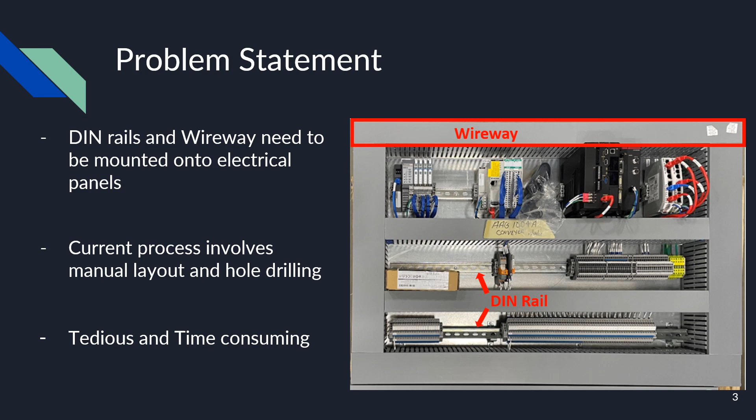Specifically, our machine must accept a panel ranging in width and length of 16 to 72 inches. The machine must also create holes with a number 21 size drill bit with a tolerance of 0.01 inches. The machine must have software-assisted hole coordinate input, along with emergency stop safety measures, and the overall budget for our machine is $14,000.

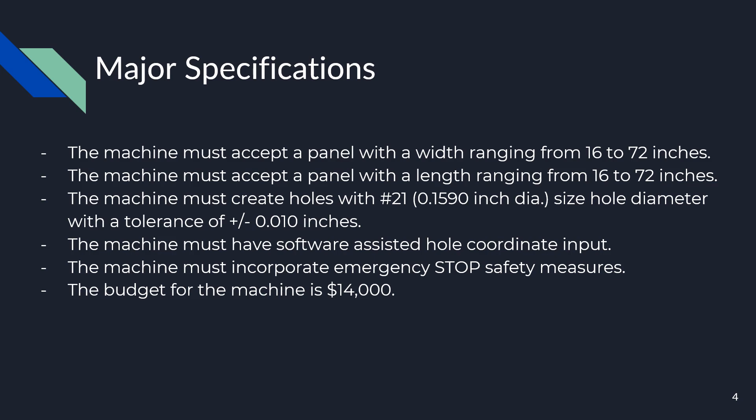Overall, the design that we have chosen to move forward with is a 2.5 axis CNC-controlled gantry-style drilling machine. That is a CNC machine with a servo-controlled x-axis, a servo-controlled y-axis, and a pneumatically driven drill. The software will use G-code generated from the electrical drawings and will be driven using the Acorn CNC controller.

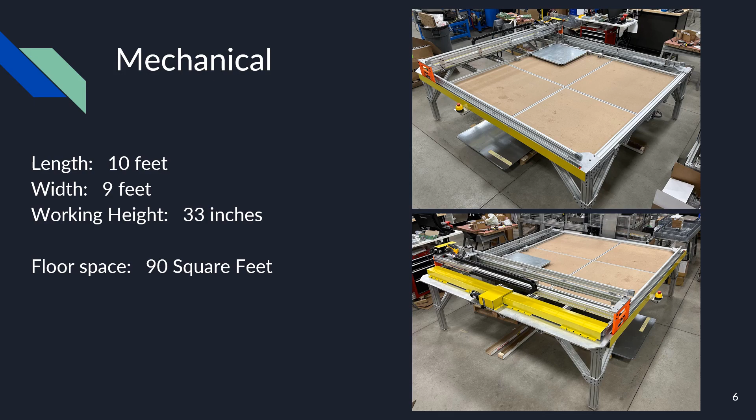Overall, the machine has a length of 10 feet, width of 9 feet, a working height of around 33 inches, and this total covers 90 square feet of floor space. Overall, our extrusion frame was built from multiple sizes of 80/20 aluminum extrusion. These sizes include 15 series and 30 series extrusion.

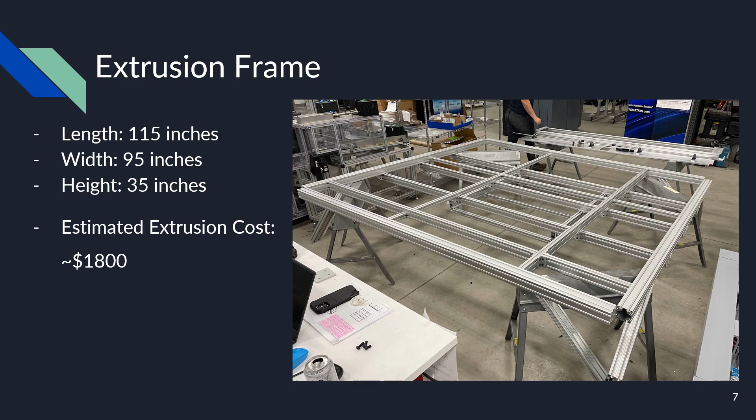Around the outer edge, we have a 3x3 inch extrusion, and then throughout the middle, we get down to as small as 1.5 by 1.5 inches. It's estimated that our extrusion frame costs around $1,800.

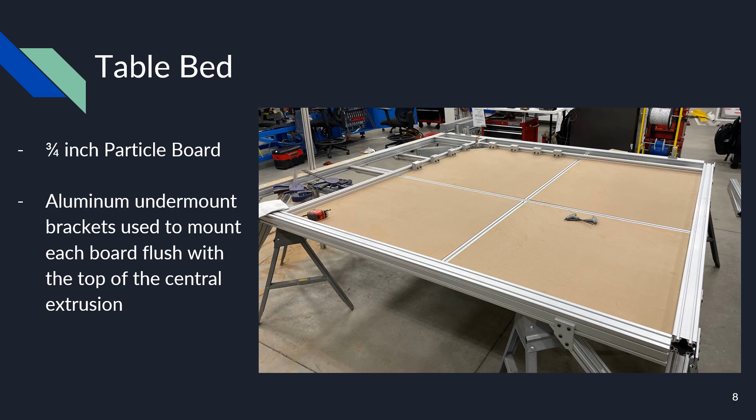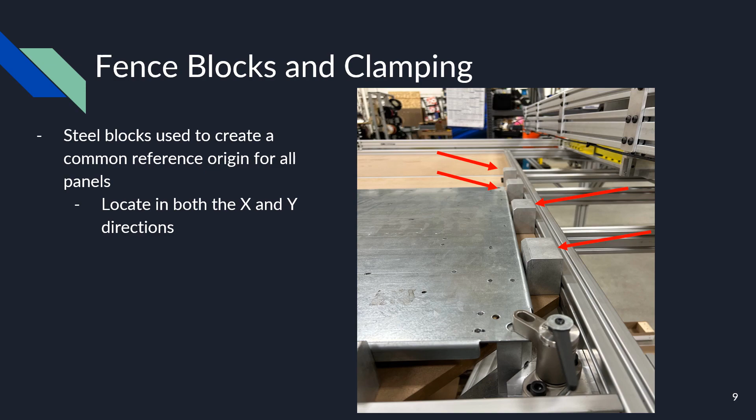These fence blocks are used to create a common reference point for every plate that is put within our machine. This will locate our plate in the X direction and in the Y direction, as well as clamp it in place. Here you can see the 4 fence plates along the X direction. Alongside the fence plates is a simple swing clamp to secure our panel in place.

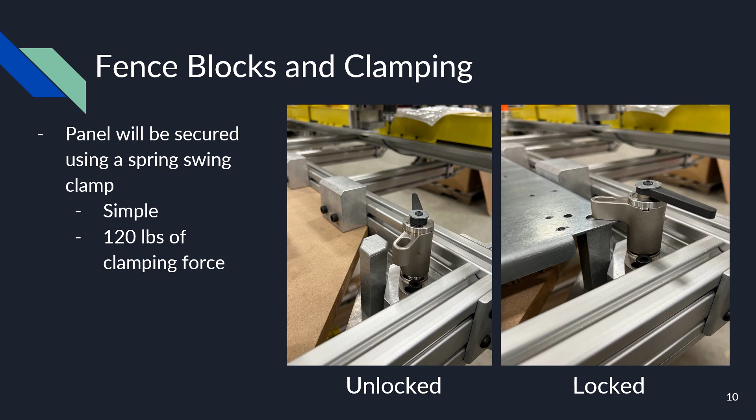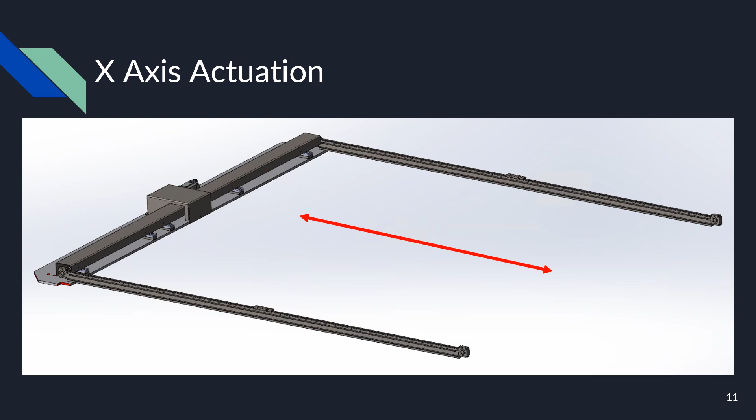Here's a closer up of the actuators we have installed on our machine. We specifically chose Misumi MSA SB1 series belt actuators. They have a length of 2,750 millimeters. They're simply mounted with corner brackets and have a repeatability of 0.025 millimeters.

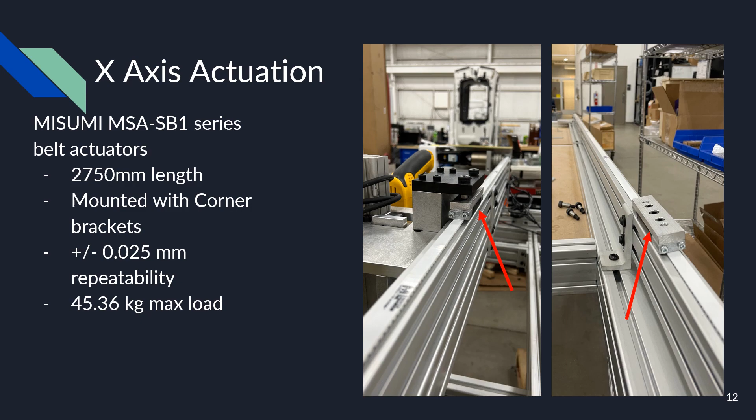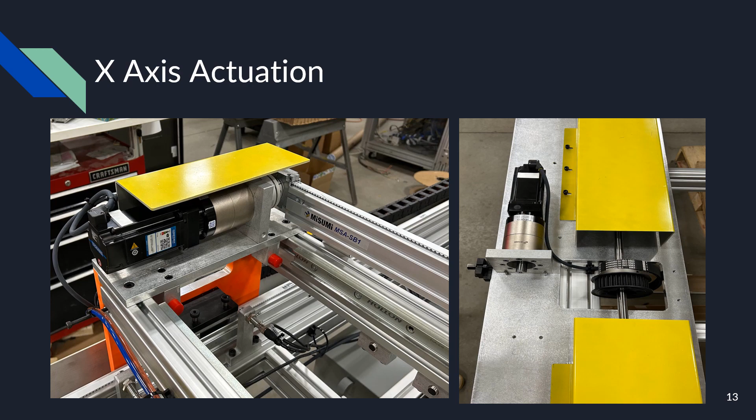Driving those belt actuators are two servos and gearboxes. On the left picture here, we have the servo that is connected directly to the bridge and directly to the Z assembly. This is one servo driving one actuator to move our Z assembly back and forth. On the right, we have another servo and gearbox that is driving the shaft that we were previously talking about for the timing of the two belt actuators.

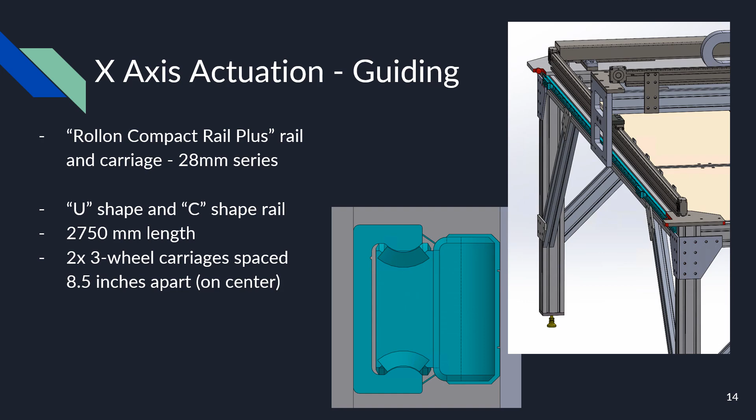Due to the weight of the bridge, as well as the length of the bridge, we chose to move forward with Rollon Compact Rail Plus guiding system. This system is there to support the weight of the bridge while the Misumi actuators move the bridge. Again, we have the gearboxes connected to the servos, which then drive the entire system. And then we have found that our timing pulley has a ratio of about 1 to 1.5 due to the 22 teeth and 34 teeth timing pulleys that we have chosen.

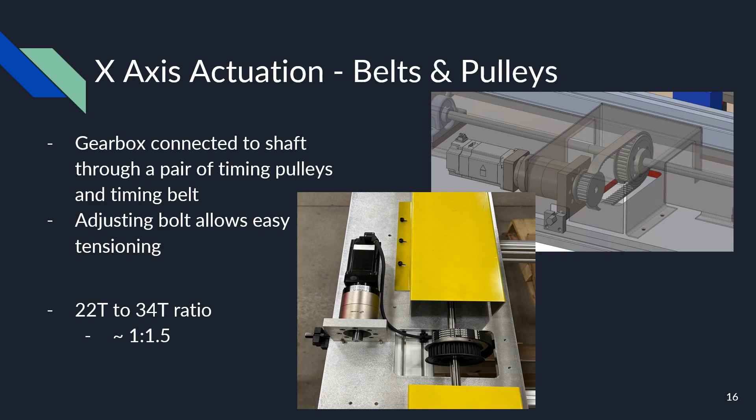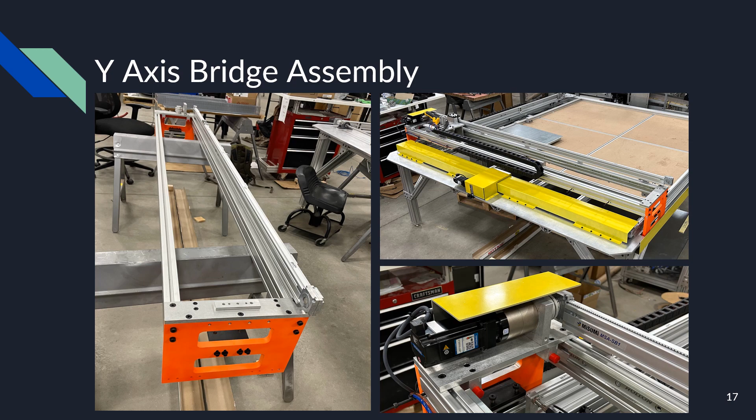Moving on to the Y-axis bridge assembly. On the left here, you can see the bridge as we were starting to assemble it. And then on the right, you can see two photos where it's assembled currently. One of those photos is how it fits on the machine while it's moved all the way into the 0 position. And then the lower picture there is how we have our servo mounted on. We will not be going into a lot of detail on this portion of the machine, as we've chosen to move forward with a very similar design as the rest of the machine.

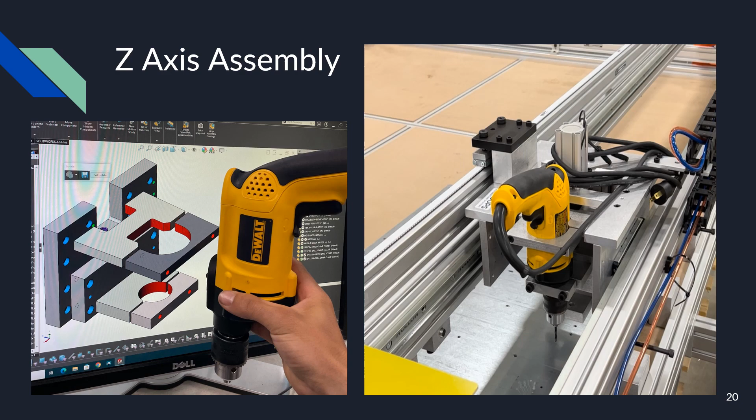At this point, we will move on to the software design of our project. As previously mentioned, the current process of drilling these panels is done by hand and manual measurement. Our solution involves creating readable G-code for our CNC controller. To accomplish this, the electrical schematic must be exported from EPLAN and modified in SOLIDWORKS, where macros can be applied.

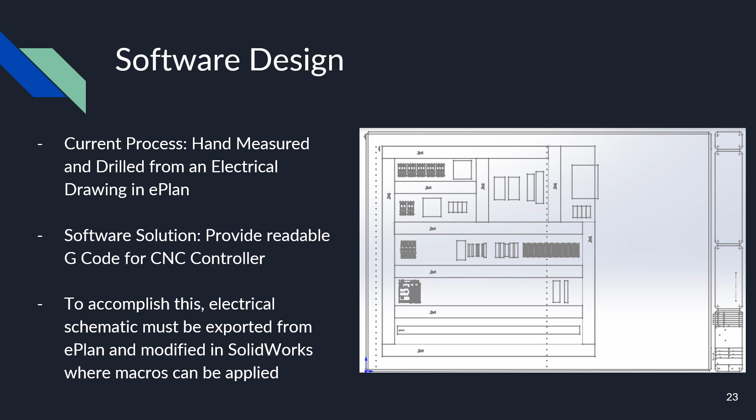The purpose of the macro is to generate G-code for the machine to give the location of the drill holes that are necessary for the panel. To do this, we need to know the panel's layout. Koops makes their panel layouts in a software called EPLAN. Unfortunately, because of licensing restrictions, we cannot manipulate or read data from EPLAN.

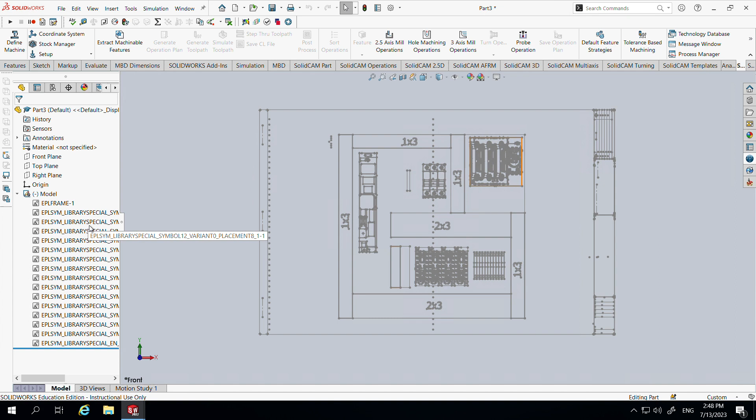So we export their plan as a DXF and open that in SOLIDWORKS, which is what you see right here. You can see some wireways, you can see the components for this panel, and so on. You can see that there are a lot of unnecessary layers, and we still have the components in here. So the first thing that the macro will do is simplify the panel layout.

It's going to delete these extra layers, and then it's going to delete any line shorter than the wireway width we're looking for. So we're looking for these, but anything shorter than those we're going to ignore. So it's going to delete. So let's go ahead and start our macro.

You'll see it's going to ask me to browse and find a file. So I'm going to go to my test files. It's going to open up. It's going to look exactly like it does behind me. So this is the direct file exported from EPLAN. So I'm going to hit done.

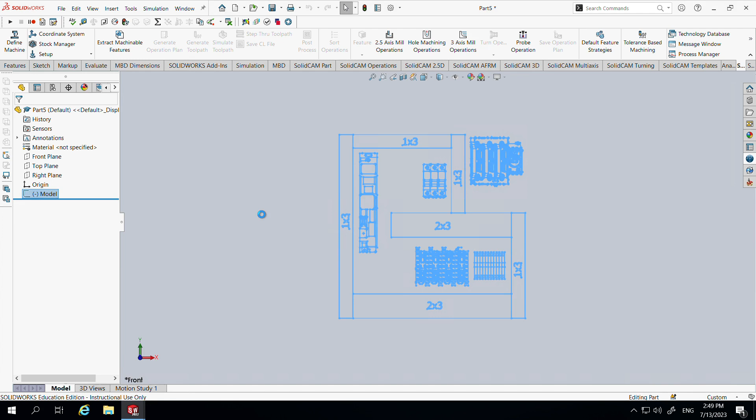It's going to first delete those extra layers, and then it's going to ask me to make the sketch editable so that we can delete those unnecessary lines. The reason this is necessary is that with a lot of these extra points, it will take the macro much longer for our sorting algorithm to work.

The way the macro is going to work is it's going to look at each lower left-hand corner of a wireway, whether horizontally or vertically applied. The next thing it's going to do is look if there's a point in either of those directions that is an expected width away, so the 1.25, the 3.25, etc. It's going to see, okay, I have one here, so I'm going to check for my other 4 corner points. So it's going to look for matching coordinates. It's going to do the same thing for the horizontal ones.

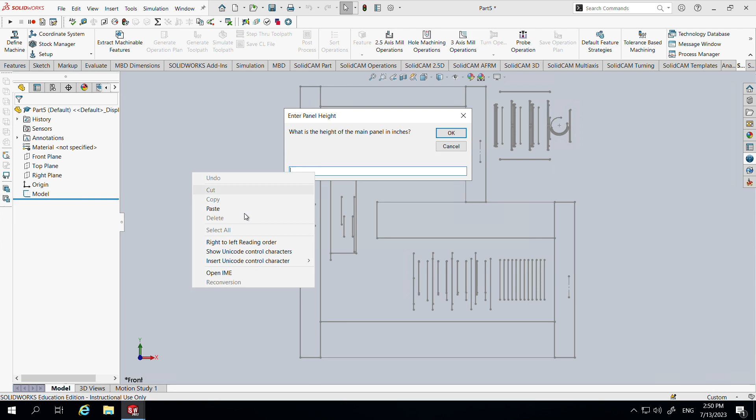It's going to need me to enter in the panel width and panel height. This is so that any points outside of the expected panel that are left over, so sometimes you'll see there's an extra setup over here with a couple other wireways that we don't want to include, it's going to ignore everything outside of these. So this is a 17 by 17 panel, so those are the only points we want to consider.

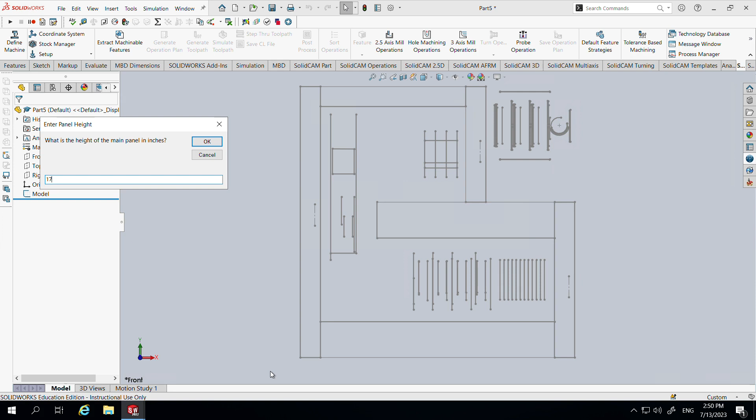You'll also see that the origin is about here right now, so it's also going to move these wireways over to the origin. After this, it's going to delete the original drawing, and it's going to recreate each of the wireways. You'll see this momentarily. So here we go. It's going to recreate each of the wireways, and then it's going to go through each wireway that's not been modified yet and make the drill pattern based on the width and the length.

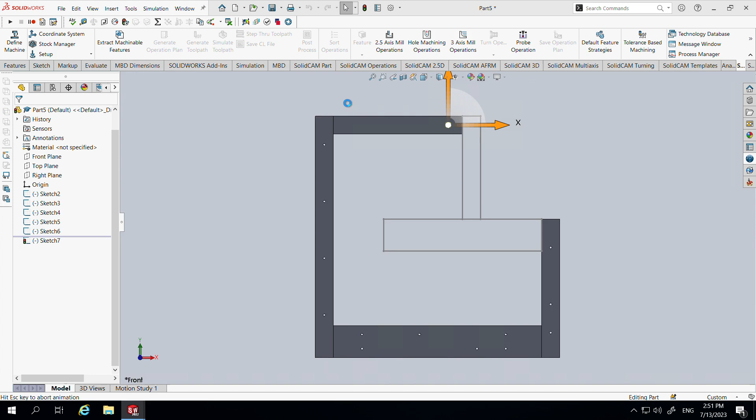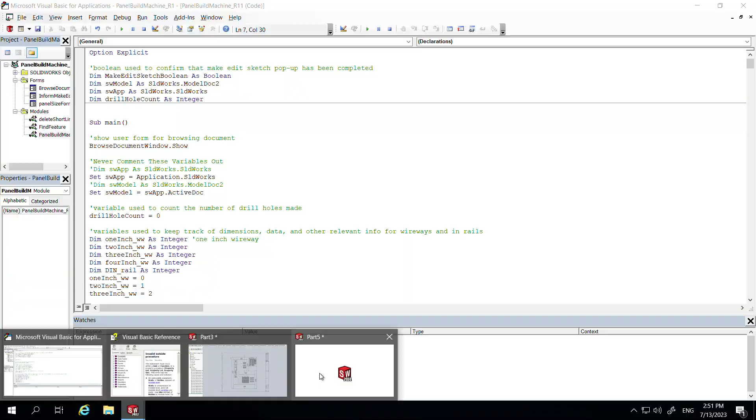You're going to see this pattern continue for all of these. If it's one of the wider wireways, it'll be 2 rows, and you'll see an alternating pattern. It'll do the 4 available corners, and then it'll do an alternating pattern for the ones in between. For the single row ones, it's going to do every 4 inches, and then 2 inches from the factory edge, which is either the left-hand side here, or the top side.

From here, the macro will open SolidWorks CAM. It's going to extract machinable features. Once we do that, we're going to generate the operation plan, generate the toolpath, and then generate the G-code. Currently, this part of the macro is still being developed, but that is what it will do. This process has already been worked out, and we have some sample ones ready to go. Once that G-code is generated, it will be transferred over to the machine, and the machine's controller can go from there.

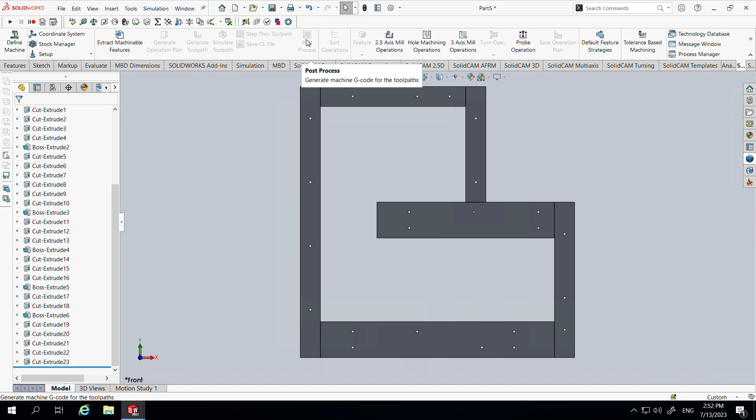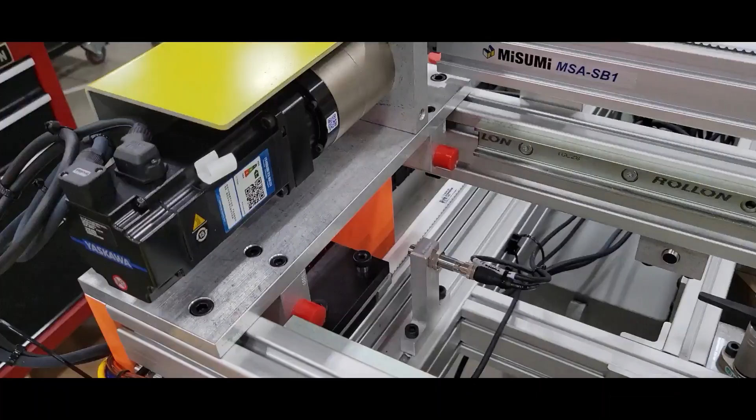The panel build machine is controlled by the Acorn CNC controller from Centroid. The controller has several relay outputs, as well as inputs. The Acorn CNC controls the position of the machine based on G-code commands from the CNC computer. Most of the inputs consist of proximity sensors, which detect the position of the machine. And the outputs consist of servo motors, the Z-axis cylinder, and the drill.